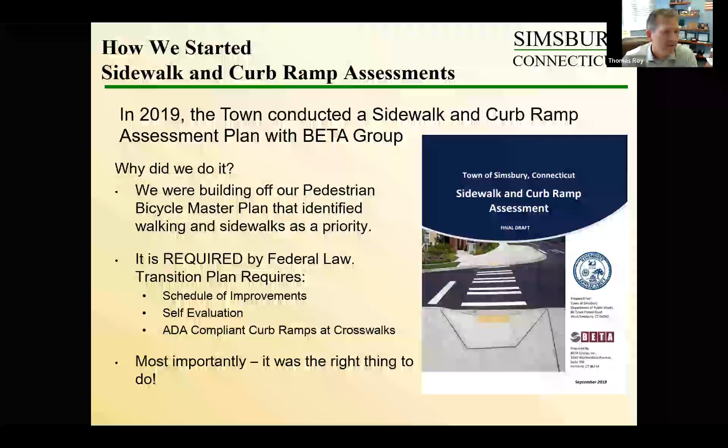The first thing we did is we needed to know what we didn't know - what do we own, what do we have in terms of our assets. We went out and did a full inventory of our sidewalks and curb ramps, with good field collection, making sure we got all of the data. We did our data analysis and worked with our GIS mapping, making sure our maps were accurate to where the sidewalks were. Sometimes we had gaps - we had maybe two properties that for whatever reason didn't have a sidewalk, and that became an impediment. So that was one of the things we worked hard on identifying.

We worked on prioritization - which sidewalks did we want to fix first? That really came down to the ones that were going to get the most use - the ones around schools, shopping centers, businesses - focusing on what's going to get the biggest impact as soon as possible. We came up with a schedule for our improvements, and as we started to go through the process, the next step is always managing and tracking the data. How are we doing? How are we keeping up with the plan? Are things coming to fruition the way we had hoped?

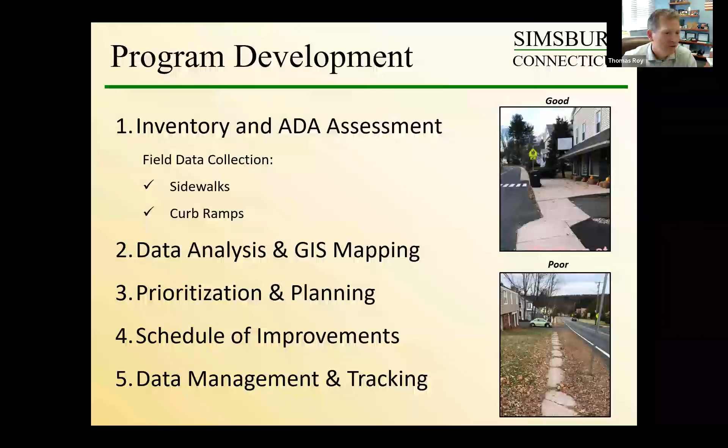Drilling down a little bit more into the assessment of the curb ramps, we were looking at the ramp location, material type—whether it was concrete, asphalt, or some other material—and the general condition of the ramp. Was it poor? Was it good? Did it have a tactile warning strip?

As we looked specifically at ADA compliance, we were looking at the ramp dimensions and the slope. We all became good friends with a SMART level—really great for ADA compliance for anybody who does home construction or carpentry. It's just too accurate; all of a sudden everything you're doing is never going to be perfectly level.

We were looking at the detectable warning panels, looking for visible obstructions. Did we have a sidewalk ramp leading right into a utility pole? Did we have a sidewalk ramp leading right into a catch basin, which would not be appropriate and certainly wouldn't meet the standard we were looking for? And of course, did we have a crosswalk at the ramp location?

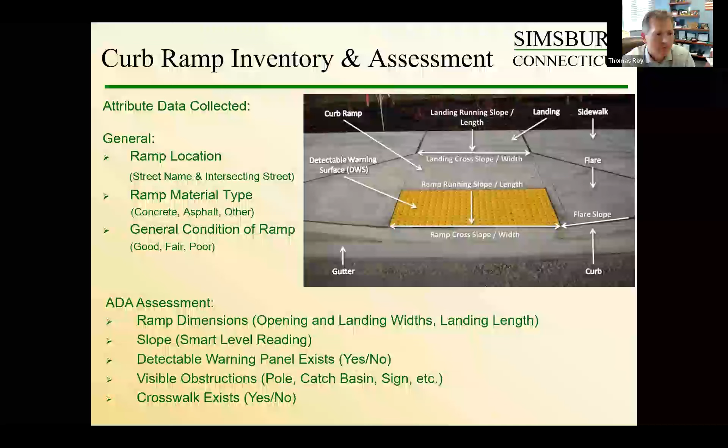Sadly, when we did this in 2019, the results didn't come back very good for Simsbury. Of the total 308 ramps we had at that time, really only 8% were compliant. That's the hard pill to swallow, when you go out and do a study and it basically says you're in a bad place. The good news is we had nothing to do but improve from that point.

This is, I think, going into the 6th year of this program. We've gone from 8% compliant to close to 55% compliant now, and we're making huge gains. If things come through as we're planning this summer, we may really target our ramps, in which case we'd be looking at maybe getting 100 ramps done this summer alone, just to bring ourselves up into compliance.

In terms of the program, we had 7.5 miles of sidewalk that needed to be redone and 283 non-compliant ramps. We mentioned the prioritization of walks and ramps near schools and businesses. We replaced neighborhood sidewalks on smaller rural streets and cul-de-sacs with asphalt, and did concrete sidewalks along our busier arterial roadways and state roadways. We gave ourselves 15 years to bring our entire program into compliance.

It was a really good discussion with our Board of Selectmen at the time as to how we could prioritize this. What was a reasonable goal? How could we make progress to do the right thing and still be fiscally conservative? We're basically putting in $200,000 a year into this program, and we've really been able to stretch it substantially.

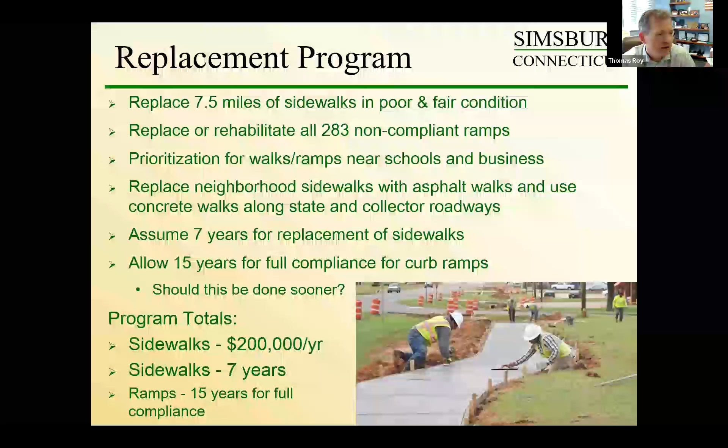We've worked with some smaller contractors and had really good success getting a good product at a very affordable price. We are planning, like I said, 7 years to get the sidewalks in compliance, 15 years to get all of the ramps in compliance.

Best part of the day is talking about lessons learned. As I mentioned, we found simple plans work best using the GIS mapping. We complete the ramps with our sidewalk rehabilitation, and of course anytime we pave a road, we have to catch up on the ramp at that point as well.

We found that it's better to, just as we did in woodshop, measure twice, cut once. Before we have the contractor place any concrete, we send out our inspector or one of our engineering staff to confirm and verify all of the slopes and dimensions. Easier to fix it before the concrete sets up—better to be safe than sorry, and certainly that's something we learned the hard way.

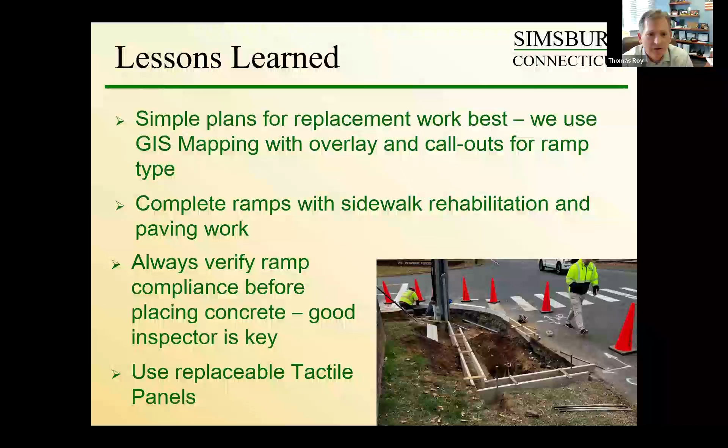Where possible, we have used either cast iron detectable warning strips or replaceable tactile warning panels, especially in areas like along our bike paths where we know they're getting plowed with pickup trucks. The plastic just doesn't hold up, so we're always looking to have something that's a little bit more durable.

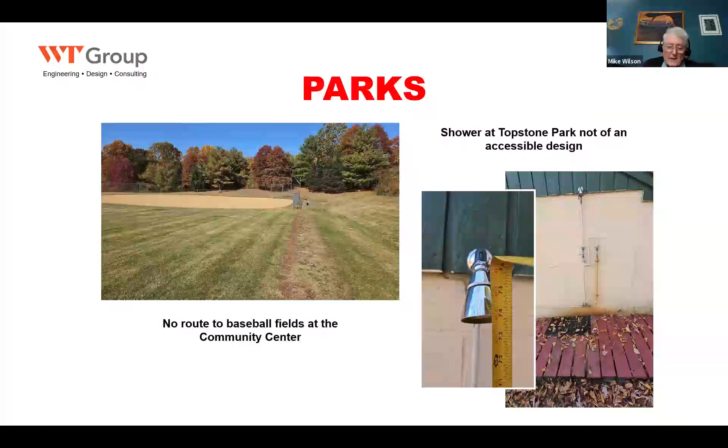Here are some examples of inspections and results. A lot of ADA is about dimensions and slope, and there are examples of every site that's been examined and studied. And those are some examples.

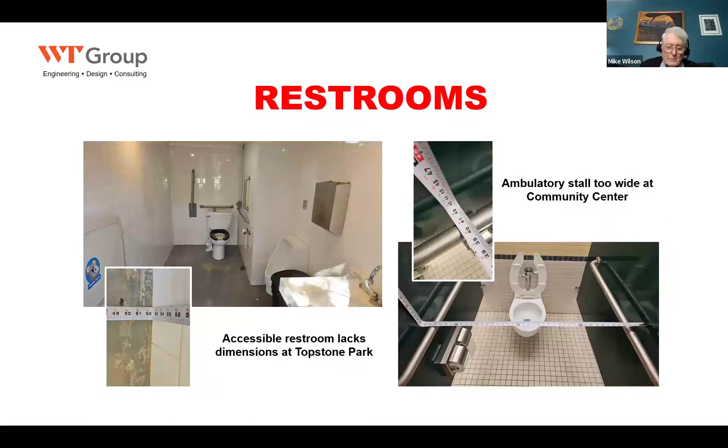Once these access audits are completed, two things happen. One is they produce site reports where each individual site is documented - its current condition, the deficiency, and the recommended improvement. Then there's a larger program that is discussed at the community engagement stage.

There's another step where the program and policy review happens - the consultants interview town staff, specifically those at the town level who have authority over granting or denying requests for accommodations by people with disabilities. The next stage, community engagement, is where these results are presented and reaction received. This includes live meetings, surveys, and often working with local advocacy groups.

The purpose of community engagement, by and large, is that the list of retrofits necessary extends over a considerable period of time. So the essence of community engagement is to prioritize the retrofits - what should be done first. Here are some suggestions and prompts that people can discuss: is it based on location, how busy it is, or what we call the basics? And then that feedback is gathered and goes into the transition plan.

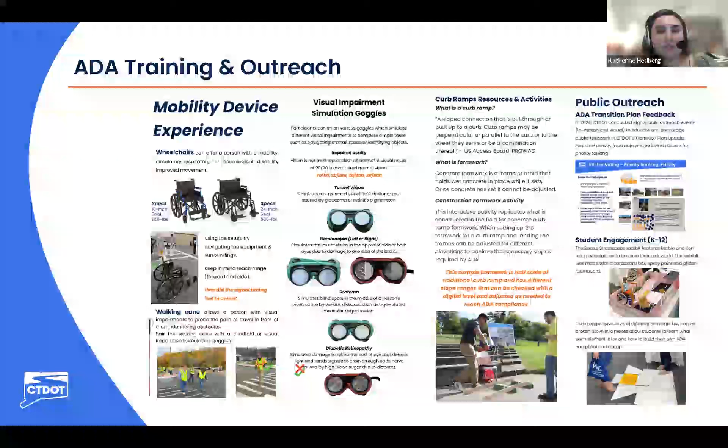Just to recap, on that same training link there's a brochure of what was actually featured in the toolkit from the T2 Center and our group. There are different vision goggles that replicate different visual impairments, wheelchairs and walking canes. The newest addition is a sample form work, so when training new staff, before they get out to the field, they can see what form work might look like and test it out.

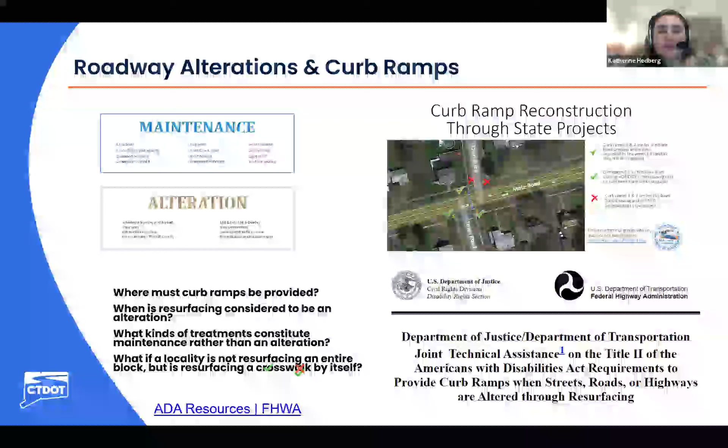Really just driving home why this is important. For roadway alterations and curb ramps, as Tom mentioned, the Department of Justice and Department of Transportation have a joint technical assistance memo that outlines the differences between maintenance activities and alteration activities. When alteration activities happen, the curb ramps must be upgraded.

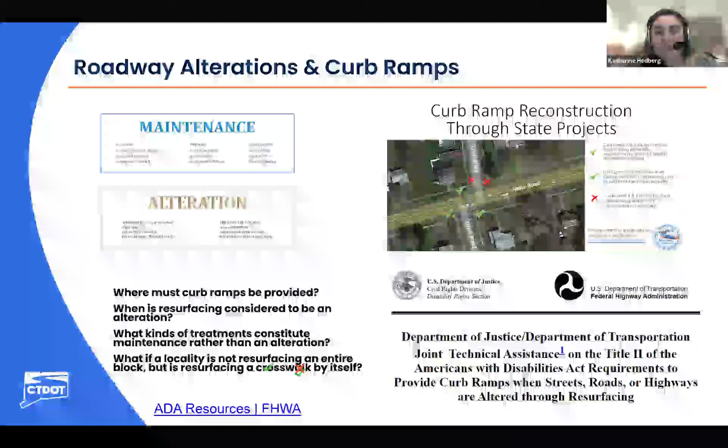For a state project that's going in, we have this example showing the curb ramps impacted by the state paving project, which would get upgraded. If there's a receiving ramp paired with one being upgraded, as a good faith effort, where we're able to, we will also upgrade that one. That's what curb ramps 3, 4, and 5 are showing. Curb ramps 1 and 2 are set back from the roadway, not impacted by the project, and would not be scheduled to be upgraded.

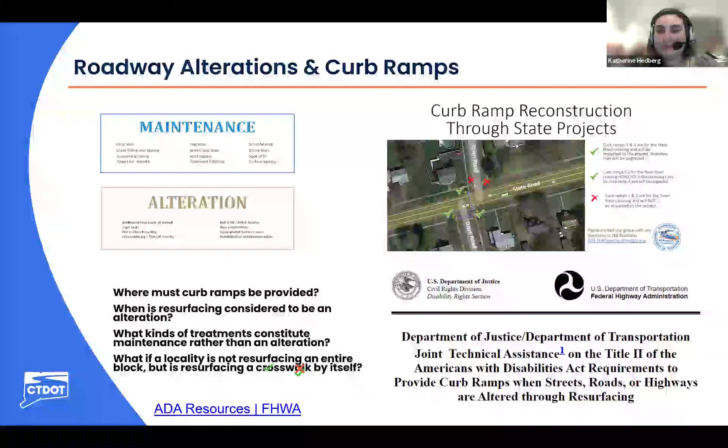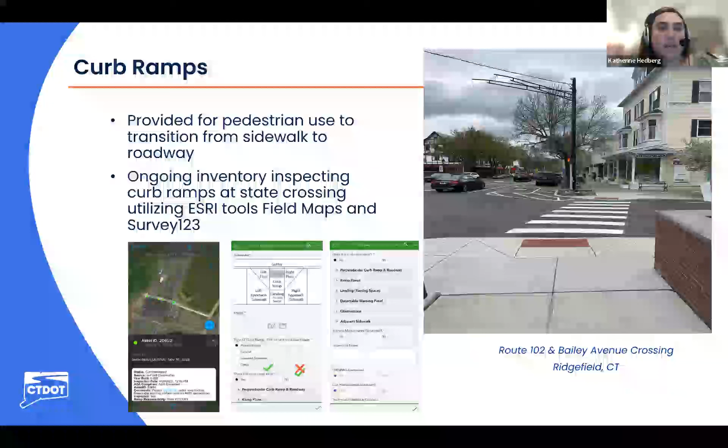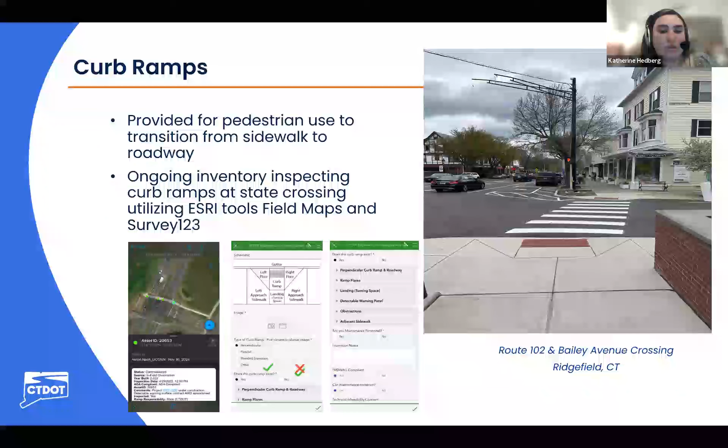For our curb ramps, we have an ongoing inventory inspecting all the state crossing curb ramps. We use Esri tools called Field Maps and Survey 123, mobile device apps that look like what's shown on the screen. They have a number of different fields for the PROWAG requirements for curb ramps, and this all gets saved into our dashboard.

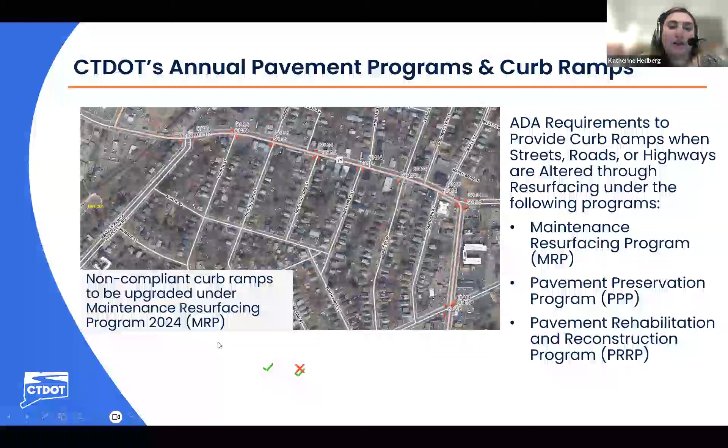For our annual pavement programs, we have three: maintenance resurfacing program, pavement preservation, and the pavement rehabilitation and reconstruction program. When a project comes through, we'll look at what the project limits are and what curb ramps aren't compliant that would be included in the project. This is just a screen share of what our dashboard looks like on our end.

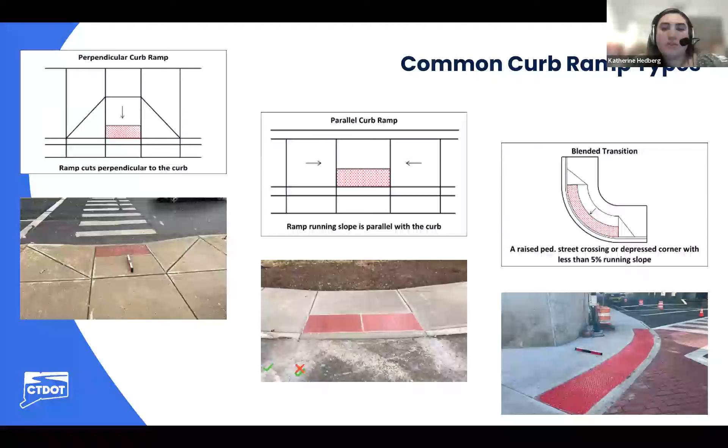Going over the basics, typically we're seeing three types of curb ramps: a perpendicular curb ramp where there's a landing provided at the top, a parallel curb ramp where the landing's provided at the bottom, and then a blended transition that is specifically less than 5% running slope and extends the full corner where the two crosswalks might meet. For the perpendicular and parallel, those curb ramps have up to 8.3% cross running slope. So it's important to note those two differences.

We do have a guide sheet library that has over 30 different types of curb ramps using the PROWAG requirements. These have been laid out to help designers with guidance on how to build curb ramps. That link is online, and it will download as a zip file into a PDF package, so it's easy to go in and see the concrete sidewalk ramps. There's about 11 or 12 sheets that will download.

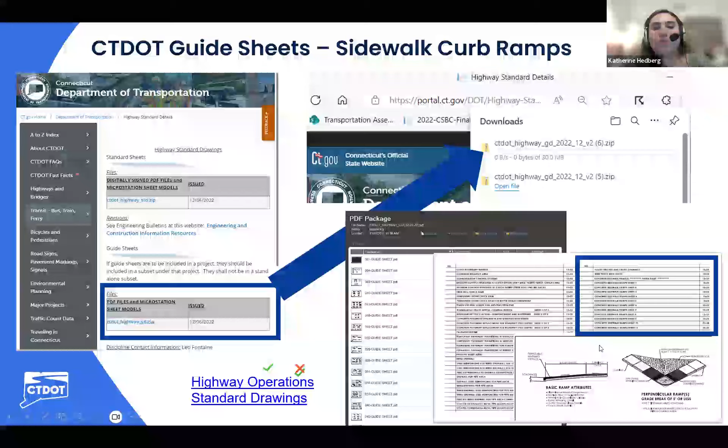Walking through curb ramps through the entire project phase: you're going to look at the existing conditions, go through the design with the guide sheets. You might need to upgrade the guide sheets depending on what your actual limits are for the field, the construction, and then your finished product. You're going to want to inspect at almost every phase of the job to ensure that your finished product is correct.

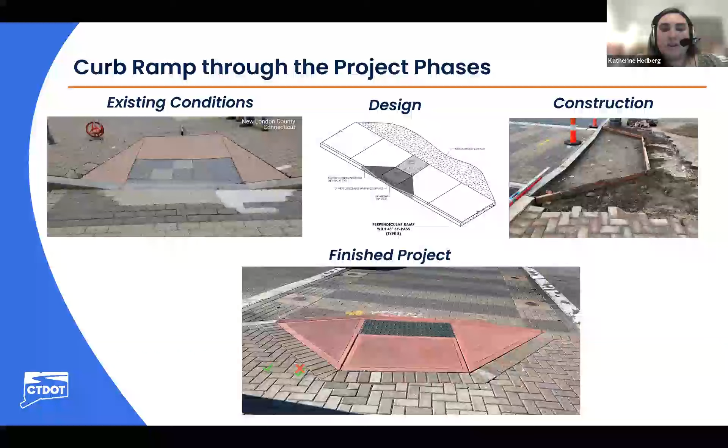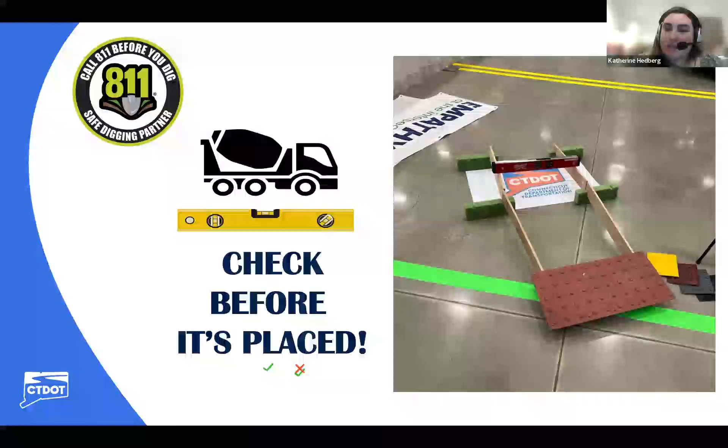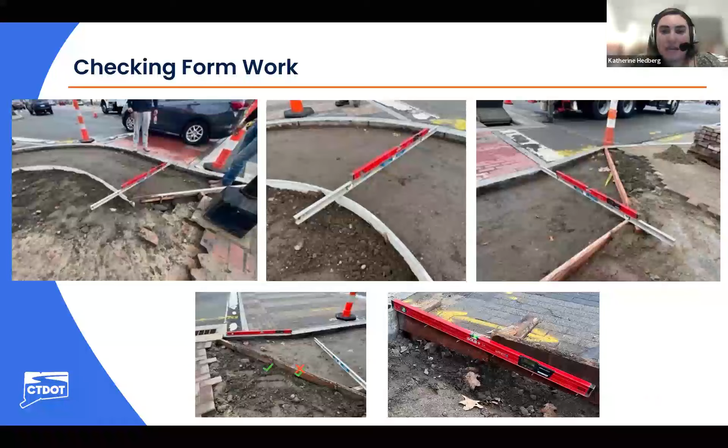Like I mentioned before, our newest tool - you would never dig before you called - so we're trying to push check before it's placed. Once the concrete's placed, you cannot fix it. So we have a number of different pictures showing where checking the form could be done for the different types of curb ramps, where the different measurements would be taken. It's very important checking both the running slopes and the cross slopes.

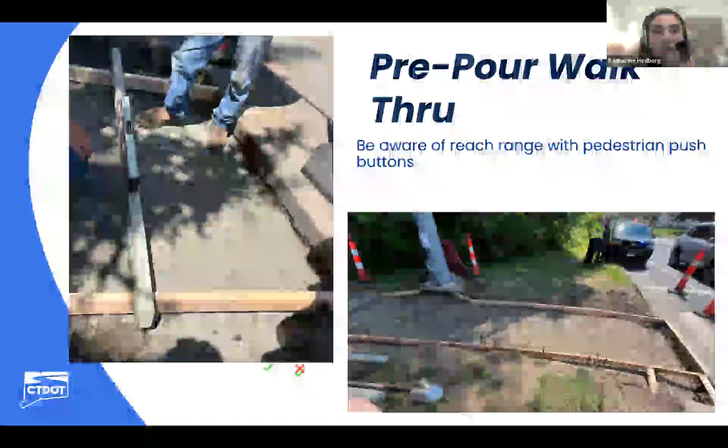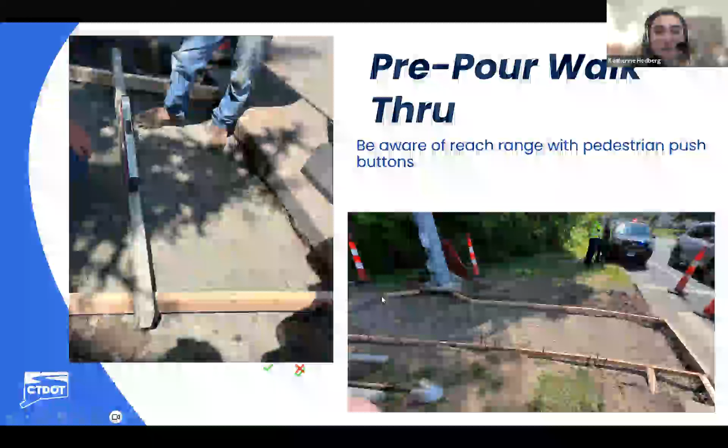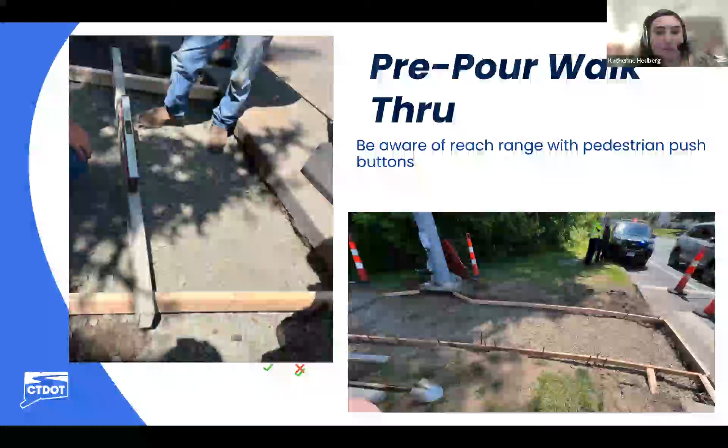Another item to be aware of is making sure that if you're working in an area where there are existing pedestrian facilities like a push button, the proposed work is going to be inclusive of those. In this situation, originally the formwork was supposed to just be parallel to meet up with the existing sidewalk, and it would have formed a reach gap of over 10 inches - 10 inches is the maximum. I believe it was almost 20 inches. So the contractor was able to adjust the formwork to extend to that push button to avoid any impacts.

Next is detectable warning surface. This is a huge thing that we're seeing from the law. The detectable warning surface must extend the full width of the ramp. If you have a 5-foot wide ramp and only a 4-foot wide detectable warning surface, it won't meet the full width, so it's very important that that gets checked. In this situation, the contractor was able to get a 5-foot detectable warning surface.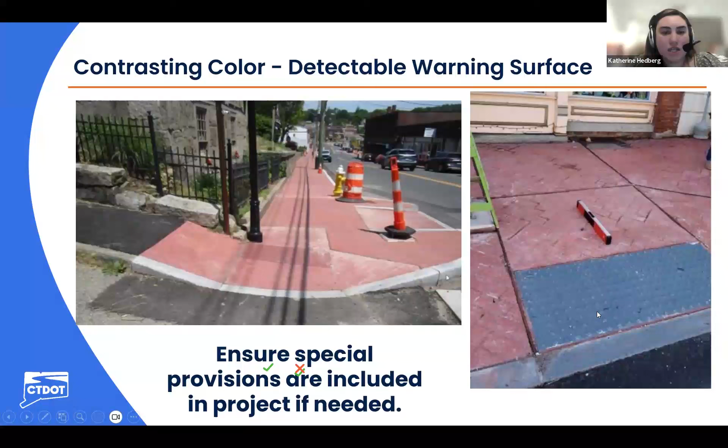And then Tom had mentioned cast iron. Cast iron is meant to rust, and that's typical. Depending on how long the product has been outside, the contractor could arrive with it already rusted, or it'll show up as gray and rust over time. We're seeing this issue where brick is being used because as it rusts to the brick red, it then is camouflaged with the brick surface. So that's something to be aware of.

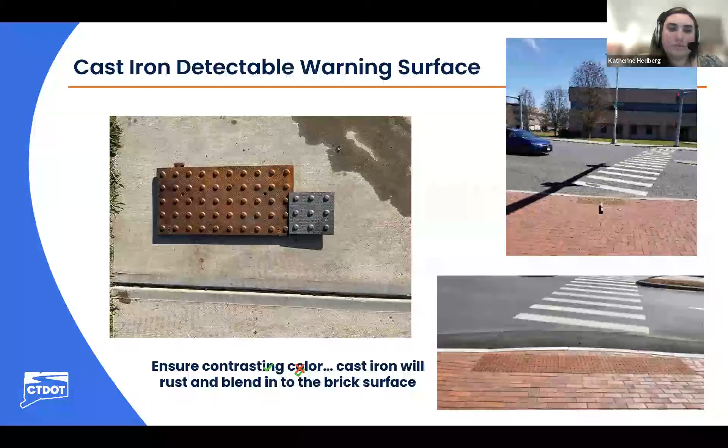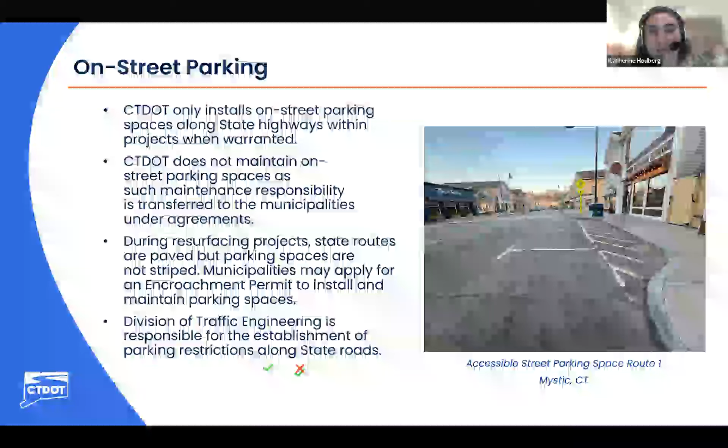On-street parking is also a requirement that has ADA accessibility. The state does install on-street parking where it's warranted in projects; however, we won't maintain that spacing - it'll be transferred to municipalities under agreements. During resurfacing projects, the parking spaces are not striped, but municipalities may apply for the striping under the encroachment permit process. Traffic engineering is responsible for the establishment of parking restrictions along roadway, so if you're working in any area limiting where parking is allowed, the traffic group would work with that.

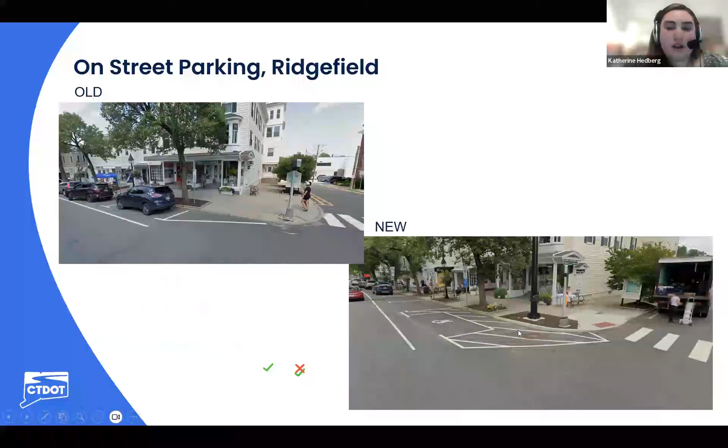We just have some examples of projects that have included ADA parking. From the 2013 version, there was requirements for hatching. In the 2023 version, there is no more hatching for the access aisle noted, so these are all from that previous one. This is just a different style where it's stall parking instead of the parallel parking.

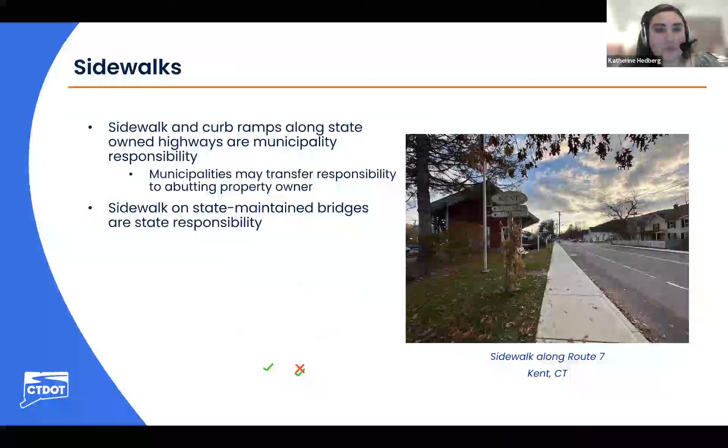Sidewalk responsibility falls to the municipality. However, if they're on state maintained bridges, those fall to the state for responsibility. Some municipalities transfer their responsibility to the abutting property owner.

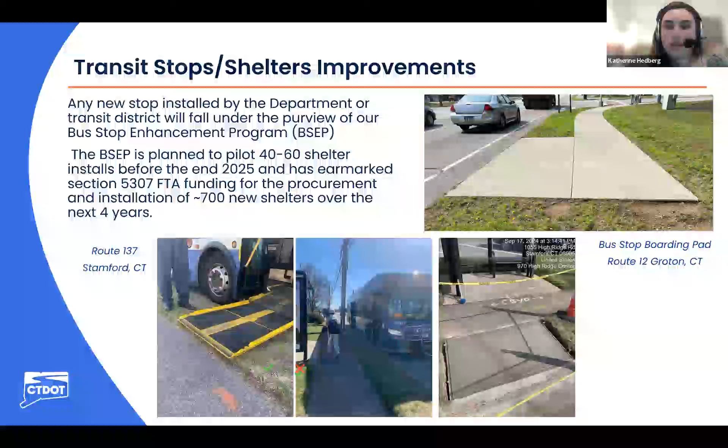The last thing to be mindful of is temporary traffic control and construction. Under PROWAG, alternate pedestrian access routes must have the same level of accessibility as the surface that's being closed. We've had a few projects where we closed one side of the bridge and got requests from community members to extend our crossing time, allowing them more time to cross the street as they adjusted to the pedestrian detour. That was something our group worked on with traffic.

Other times with roadwork signs, it's about being mindful of where the sign is actually placed, that it's detectable but not impeding the travel way that isn't intended to be closed.

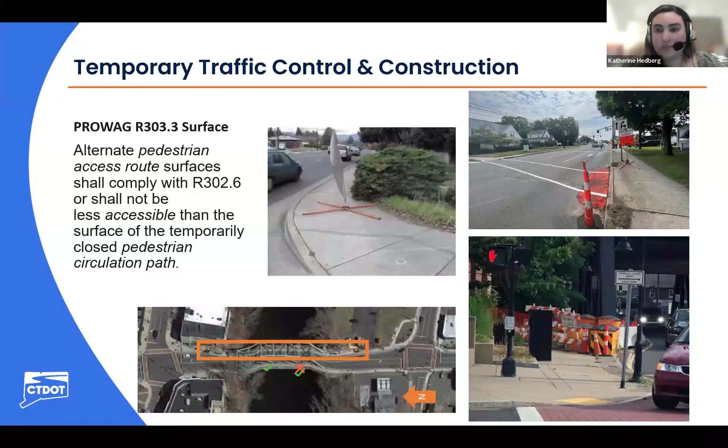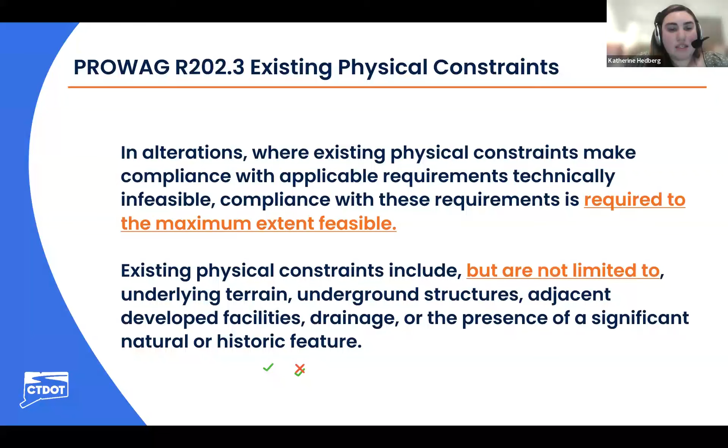Getting into physical constraints, where it's not possible to make things compliant, it's required to meet them to the maximum extent feasible. A number of things might play into it, such as underlying terrain, underground structures, adjacent developed facilities, drainage, or the presence of a significant natural or historic feature. To document that we achieved the maximum extent feasible, we use our technical feasibility form.

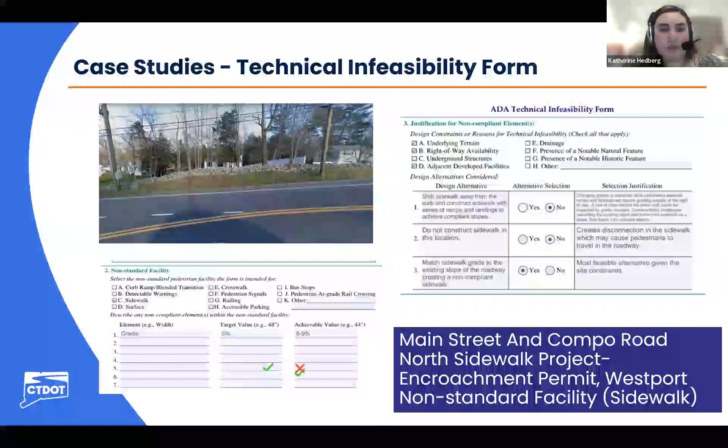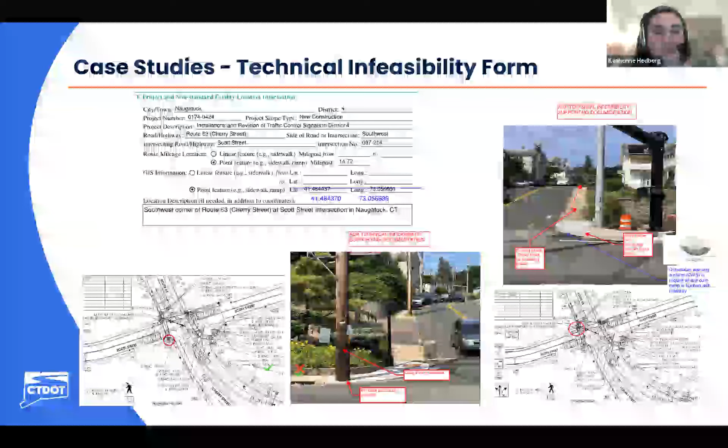I just have some examples of forms we've seen—one where the grade for a new sidewalk can't be met because the adjacent roadway is steep, and a sample submitted for when utilities are impacting the project, which includes a copy of the plan and additional documentation.